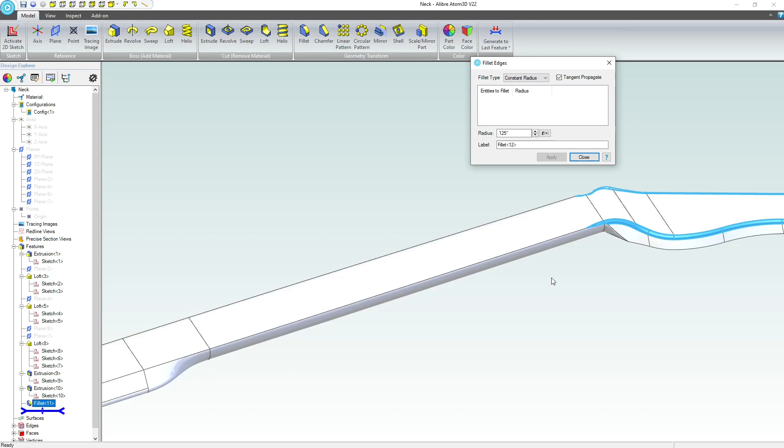Let's start by going to the fillet feature. If I fillet this top edge with an 1/8 inch radius, that seems to go in no problem. But if I try to add a fillet here, we get 'too complex for capping.' So we're going to get rid of that fillet and try to add one in a different way.

It appears the capping issue happens because we have some convergent edges in here, and we can easily clear that out. Maybe I'll select this whole edge so there's no question as to how I want this fillet to go through. Similarly, I can highlight some of the edges up here and do the same thing. We'll send this fillet down this edge and apply, and that fixes the 'too complex for capping' issue.

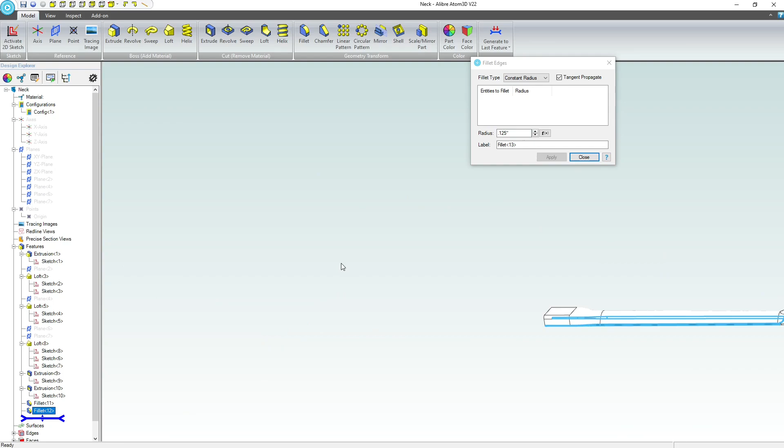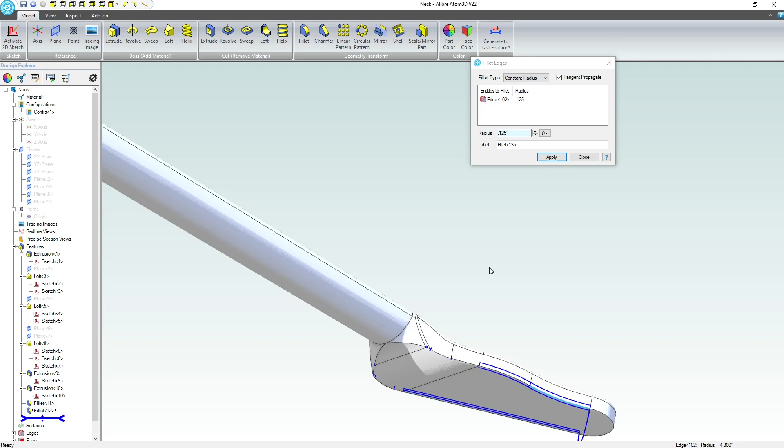If I look a little closer, our edges are indeed smooth, which is quite bolstering. So we've at least smoothed out the top. Let's also smooth out this bottom here. You can see that goes around pretty nicely, so we're able to smooth out the bottom there. Everything else, apart from maybe right here, should be smooth.

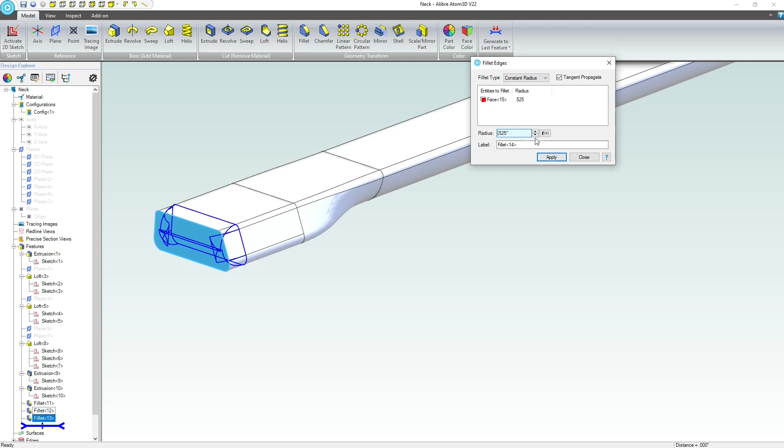We did have an interference issue on this edge right here with the mating component, so I might want to move that up. Maybe not that far, of course, but 0.525 ought to be fine. So we'll close that, and I think this could be a neck without sharp edges.

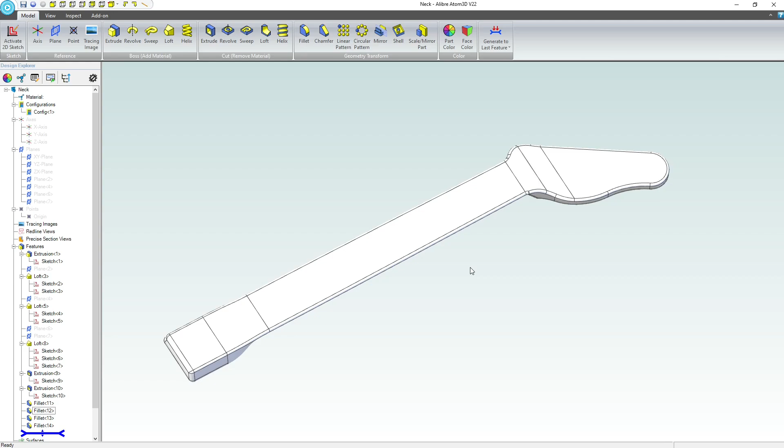That's pretty cool. Next, we'll want to add in frets. Frets can be tricky, but there's a good source, right? StewMac.com has a fret position calculator.

Let's say I enter in 24 frets and an unusually long scale length of 27, where the scale length is from the nut to the bridge, the total length of the string. This would be the dimensions for that specific configuration. So depending on where you place your bridge dimensionally, you can actually scale each fret to be whatever you want. It works in millimeters or inches. I work in both units on this channel, so I'm doing inches on this one.

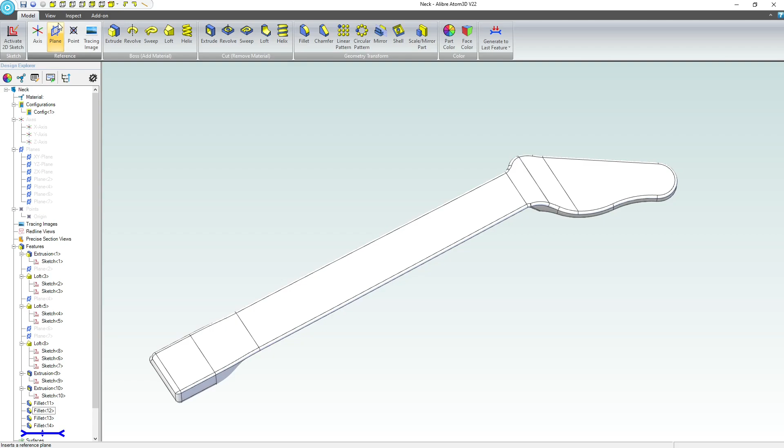Let's actually add some frets, and to start we need to add a nut. I'm going to go to my view and toggle my planes here. I may need to toggle my sketches at some point as well. I'll highlight this nice center plane and activate a 2D sketch on it.

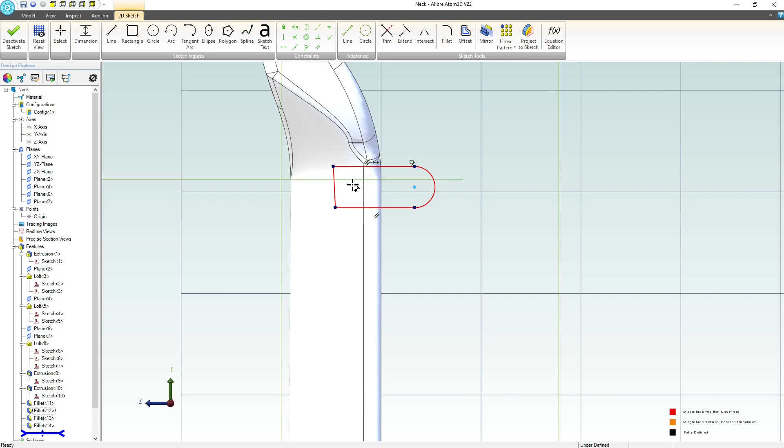Let's make a line, then an arc, and then another line. I have to dimension the nut in a way that the bottom of the string on the nut clears the top of all the frets. I don't know the ideal dimension for that, but I'm sure we can take an estimate here.

Let's go with 0.7 perhaps, and then I'll add a vertical relation there. While I have my vertical up, I can add that there, which looks like it's already fine. There we go. Now I want to make a dimension relative to this edge, maybe 0.25. So that's still a bit high—0.15 maybe. And let's go here with 0.15 as well.

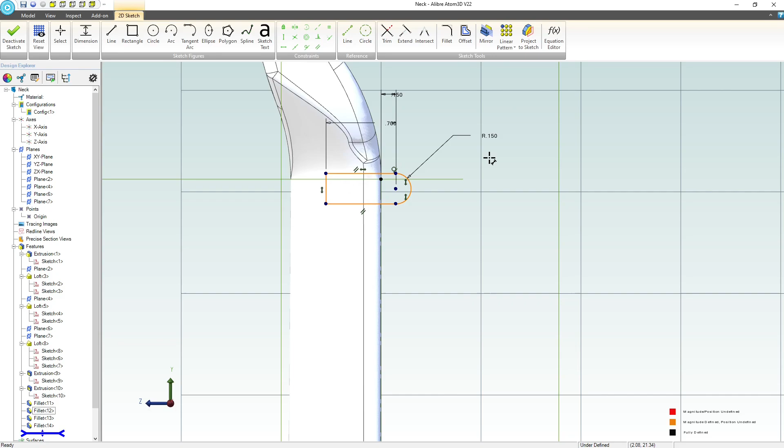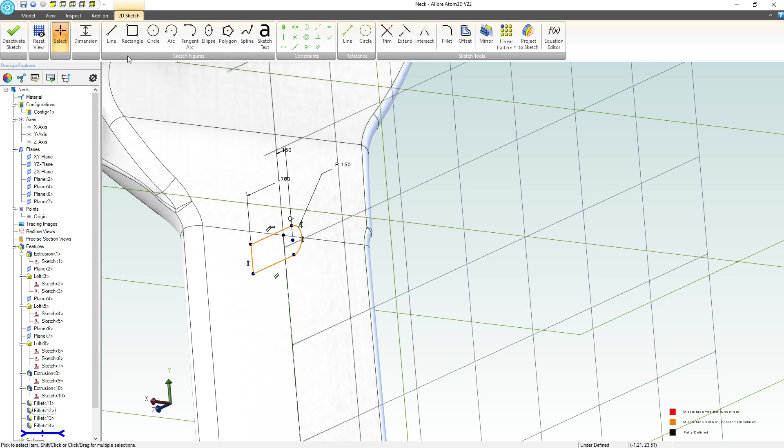And then of course you can see that this line here marks where the very top of my neck is. So this is the point where I'd want the string to be, the first free part of the string. Technically I ought to have this line lined up with this line here, so I'll be able to properly dimension my neck. We'll reset my view.

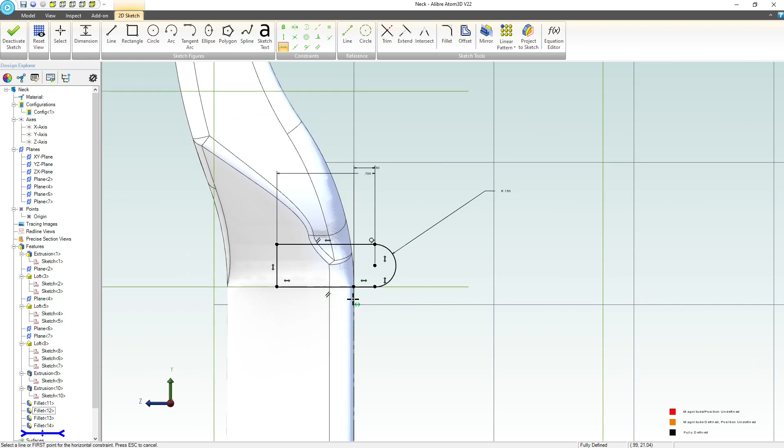So we're going to go from here, and I'll hold shift and highlight here and add in a horizontal. That means the string is free to vibrate at this line and down, and that's where I want to start my dimensions and offset all my frets from. This seems like it's still a little bit of a large nut, so I'm going to say 0.075.

Right, let's reduce that a little bit. Then it's a question of how far do we want to move out. Now that I'm looking at this 0.7 dimension, it's a little bit large, so let's reduce that so we don't have an extrusion hanging out the bottom.

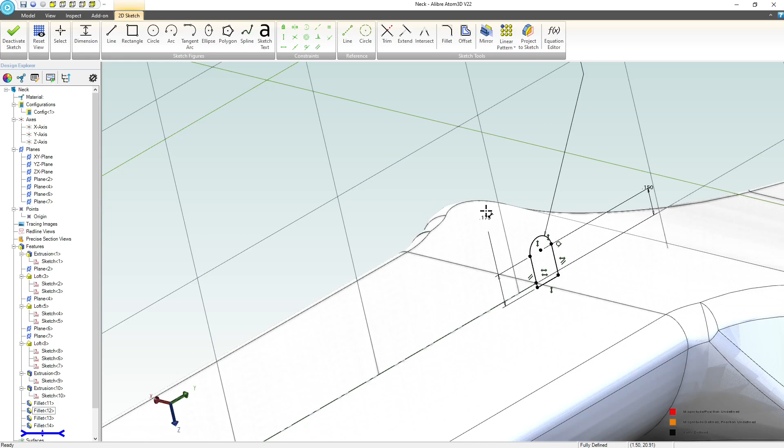0.02 is clearly not a good dimension. 0.1 is not good. 0.15 lines up perfectly. 0.175 goes down a little bit, so I'll try that. Now we're going to go to an extrude.

We'll say mid-plane. And if I visually drag this... that moved on me. That seems like a pretty good dimension. Right, so there's our nut. That's probably a bit tall to be realistic.

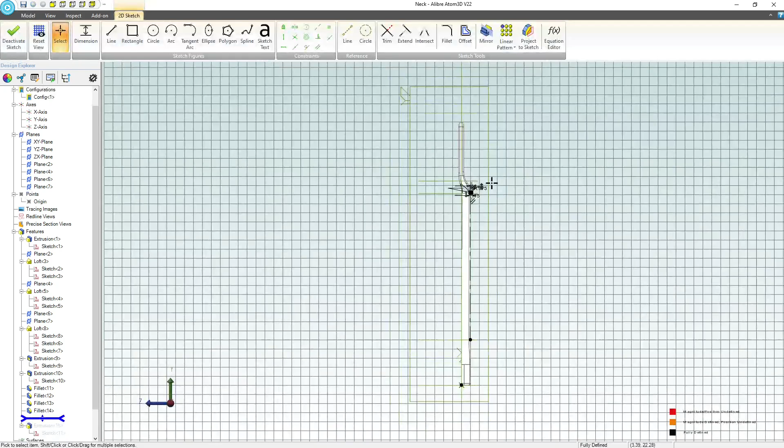But depending on how you cut the grooves for the strings or other things, maybe you can make it work. Let's edit the sketch though, and I'm going to lower that a little bit further still. I think this also depends on what kind of strings you use too. So if I lower that down, let's try 85 thou there.

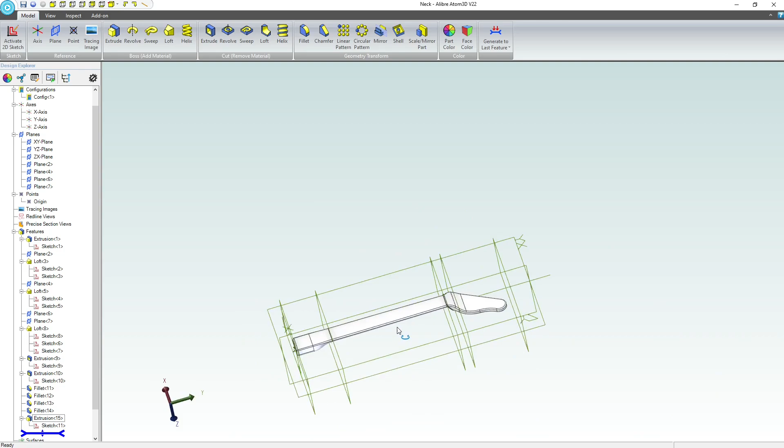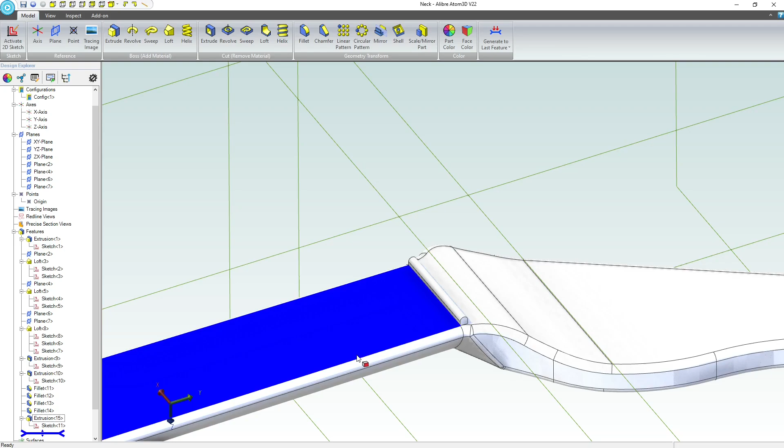Okay, so how do we make our frets? There's a number of ways to do this. One, I can draw a little circle. Frets are probably a little bit more elliptical, but you could model them as perfect circles. I could make a sketch with a perfect circle every so often, dimension them all in one sketch, and do an extrude or sweep across. Or I can model one fret at a time using a pattern. I'm going to go with a pattern, but anyone is welcome to do whatever feels best for their design intent.

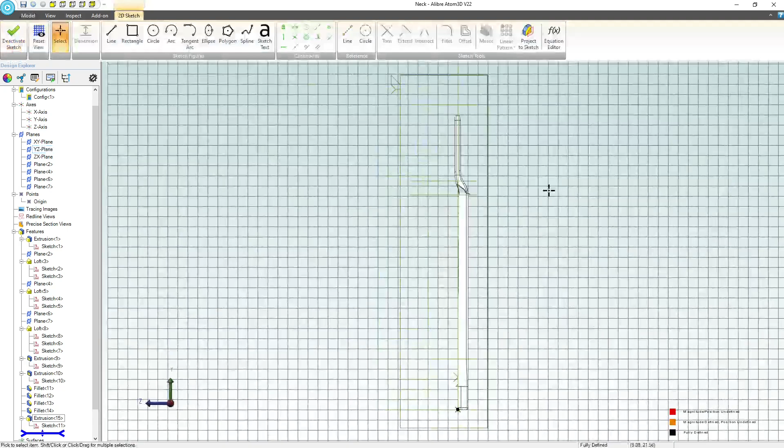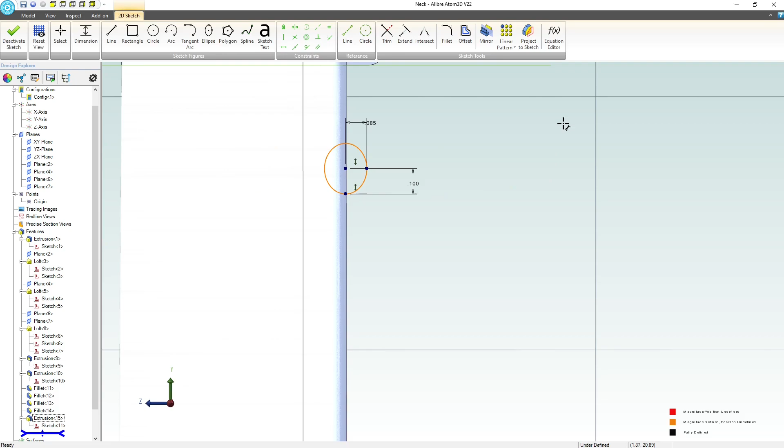So on the YZ plane, let's activate a sketch, and we can do an ellipse if we want. I think that's pretty cool, a little bit more advanced modeling. If we go to dimension, we don't want it quite as elliptical, maybe 0.1 by 0.085, just a mild ellipse like that.

And I think that fret is actually a bit large. Let's scale everything down by half, divided by 2 and divided by 2.

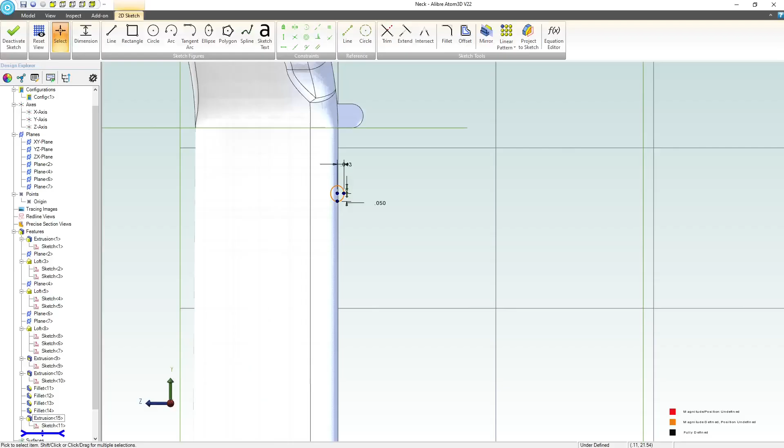Now this point, this edge right here is what we want to dimension off of. And I can go to my calculator and say 1.515. Then I have the distance from fret to fret and also the distance from the nut, depending on how I want to constrain my sketches. So let's take care of this. 1.515, right? And then I can start to repeat, and I'll add a coincident just to make sure we're fully constrained here.

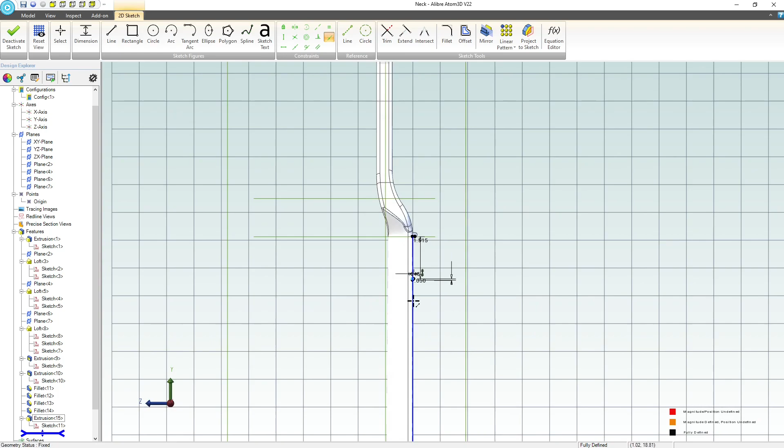I could just sketch another ellipse or circle, and another and another, and do this all in one. That's a perfectly fine method.

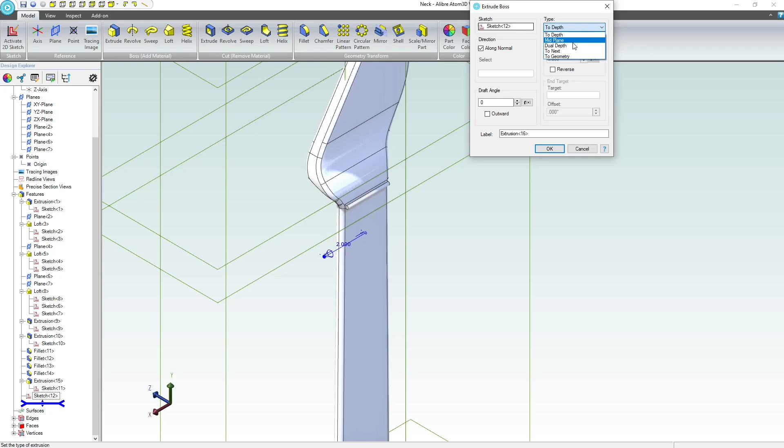For me, I'm going to try something a little bit different. So I have my sketch 12 right here. We're going to go to extrude. It should extrude to the same length, and we're going to say mid-plane, done.

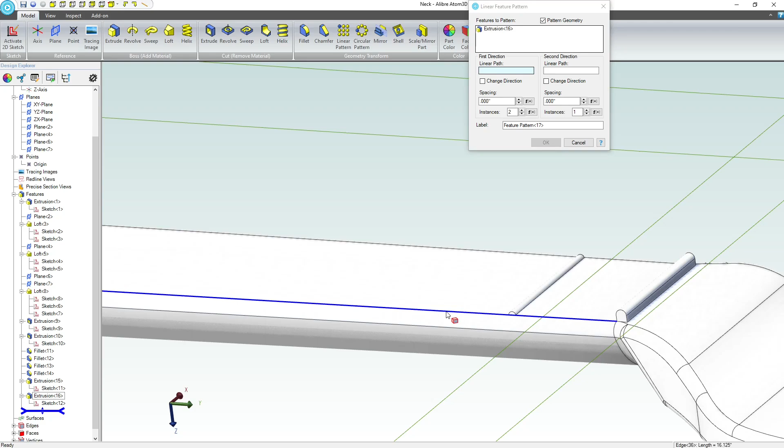So the other method I'm going to do is choose a linear pattern. We're going to choose this feature here, and we're going to choose our path right here. Or I should say our path would probably be better as an axis right there. So we're patterning down the y-axis. We want spacing to be 1.430.

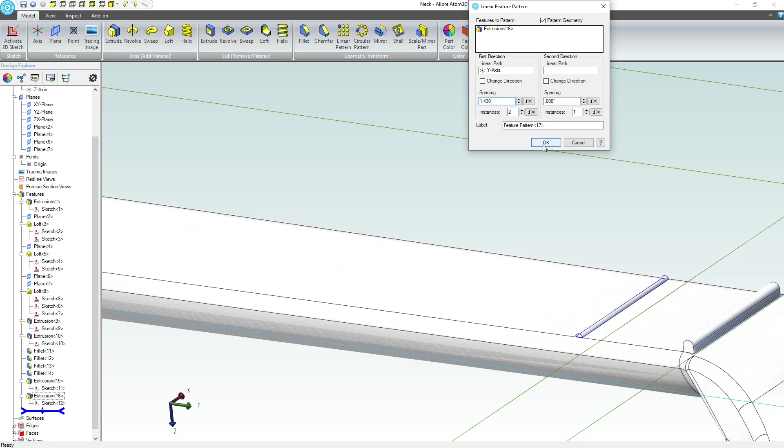And of course we'll edit that and change direction. I simply create a pattern for every fret. It's a little bit time consuming, but so is sketching everything out and adding dimensions for it. I don't think there's a shortcut for frets like this. I'm going to keep patterning one fret after the other to the dimensions I wish. I will not make you sit through this, so I'll fast forward and see you on the other end.

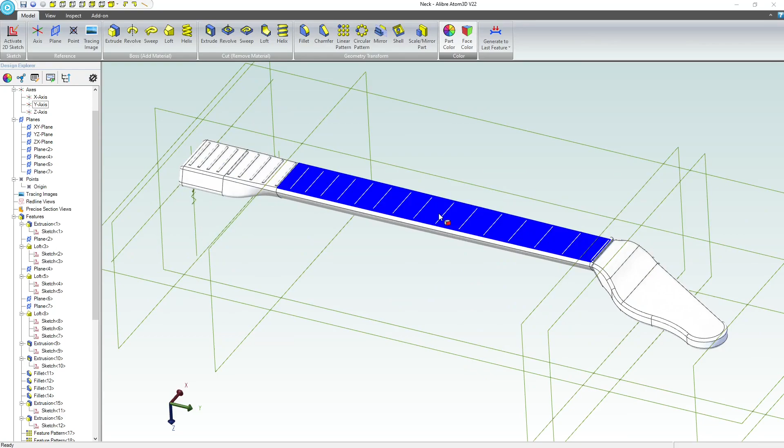And it looks like I actually mistakenly made this an inch short compared to the number of frets I'd like to have on this. So let's deal with that. It should be pretty easy to go back into history and make this a bit longer.

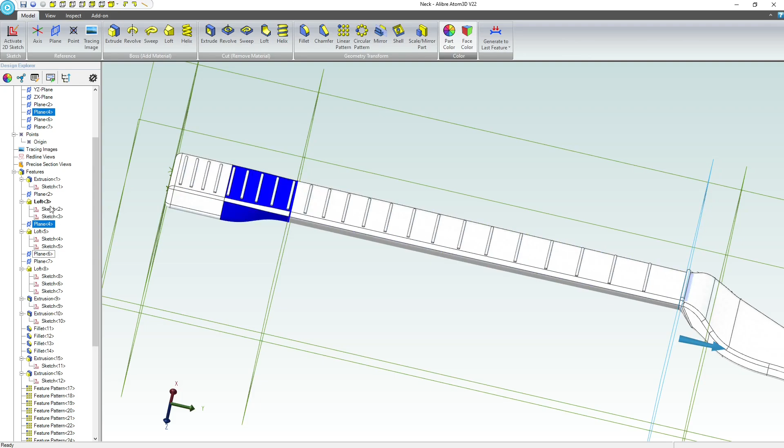So it looks like this plane is the plane that defines the length of my neck as far as the string is allowed to vibrate. So we're going to edit the position of this plane by adding an inch. And because all of my frets are dimensioned relative to the nut, we should not have any dimensional issues with regard to the frets. It does look like we've got a fillet problem here.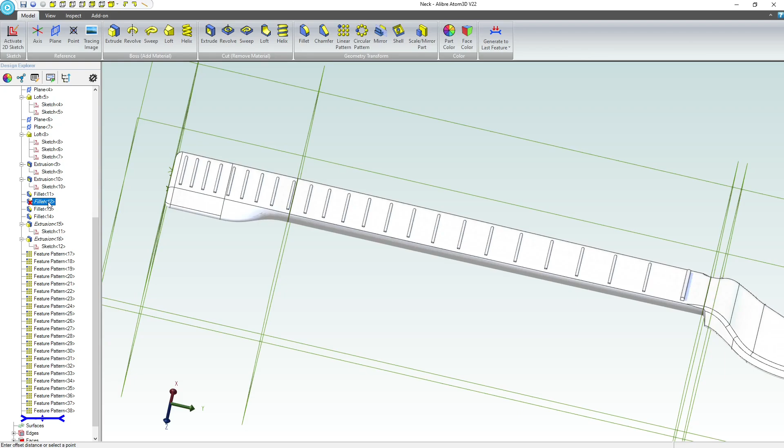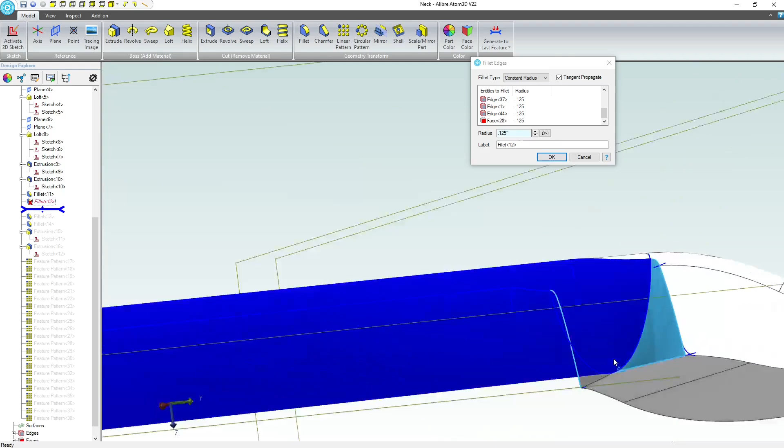How about I roll this back to where my fillet problem has occurred? Yeah, let's edit that. Right, so this is the problem we're having with the fillet, and of course this goes back to how we've dimensioned our loft.

So let's go back to this loft here. We have this sketch, and this sketch, and it looks like our other planes also need to be defined to be an inch longer, and that is where the problem has occurred.

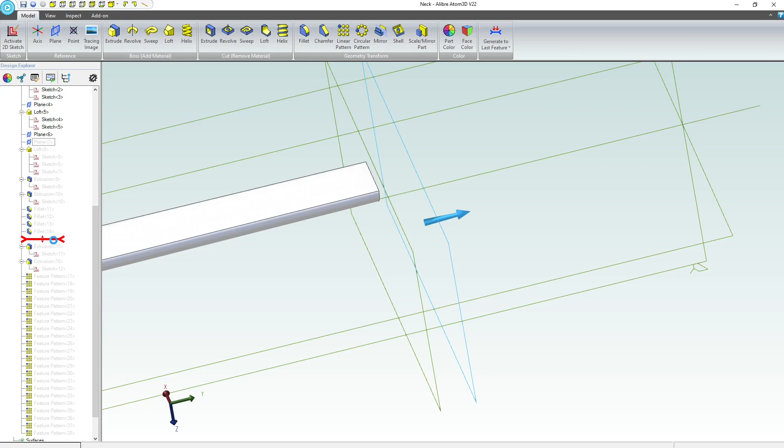So I'm going to edit my plane, and we're going to say 23. And roll that forward. And it looks like that actually worked everything out.

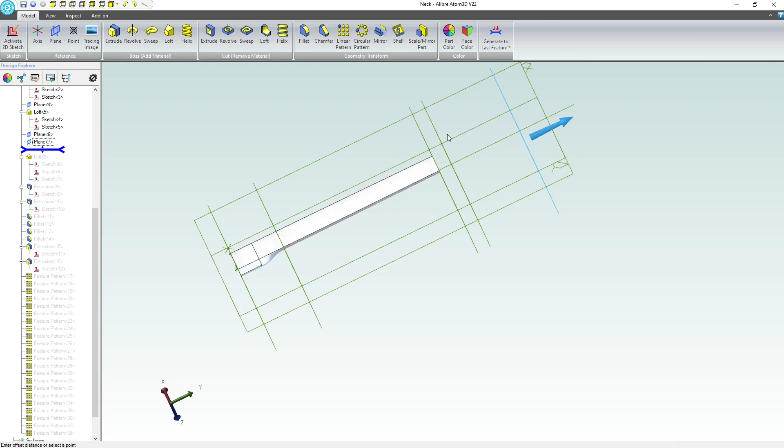But this plane is a bit too close for comfort, so let's go ahead and edit this and add an inch on it. 31. Again, this goes back to design intent. At the time I thought it was a good idea to make sure all my planes were relative to this one, but maybe the head planes had a better intent to be relative to one another. That's a pretty fine point and a rather unforeseen issue.

But now you can see we've updated. Our fillets are fixed, so we didn't even have to redo a fillet. We just had to change a few dimensions. And it looks like we're back in business now. I can finish up my other two frets. I might want to make these wider.

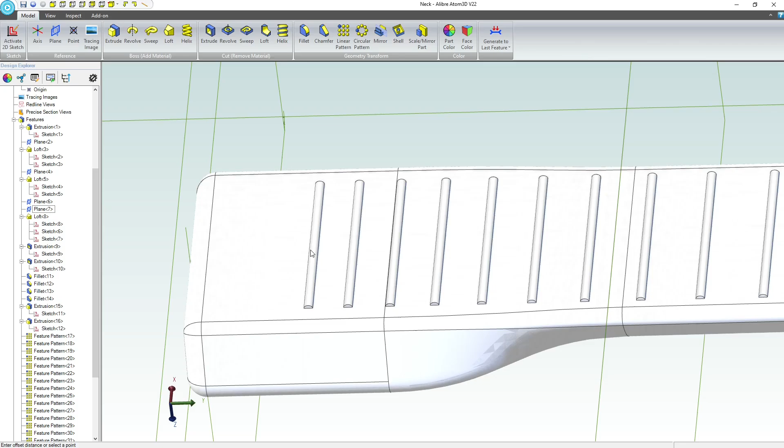So there we have a fretboard, and this is one way of doing it with all the patterns. Now the advantage is, instead of a big messy sketch, I have just some feature patterns that fill up my tree, and I can edit them one at a time, and it's really simple compared to a sketch with a bunch of dimensions on it.

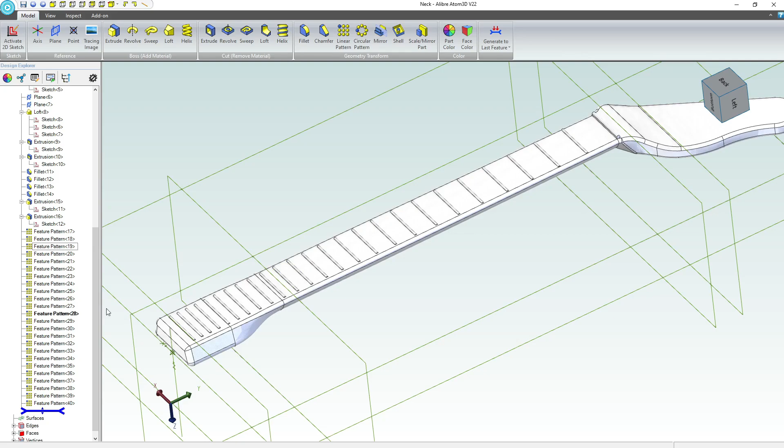The disadvantage is I have a little bit less control. You can see that my neck was made to taper down, and I have a gap here that's kind of large. But up here my gap is very small, and that's because the frets remain the same size as I progress down the neck, which gets wider.

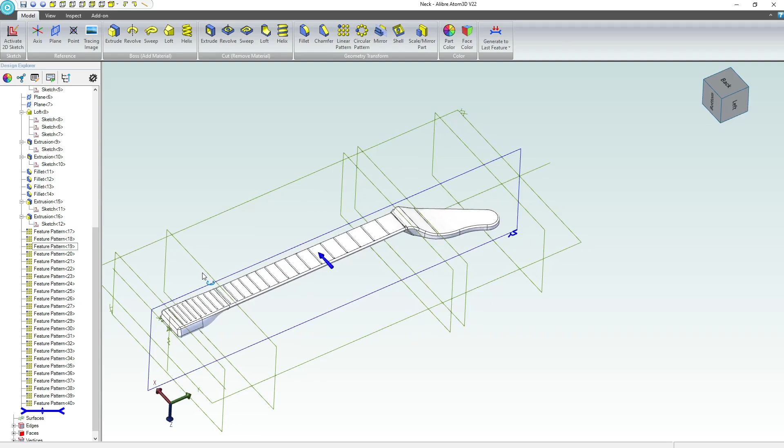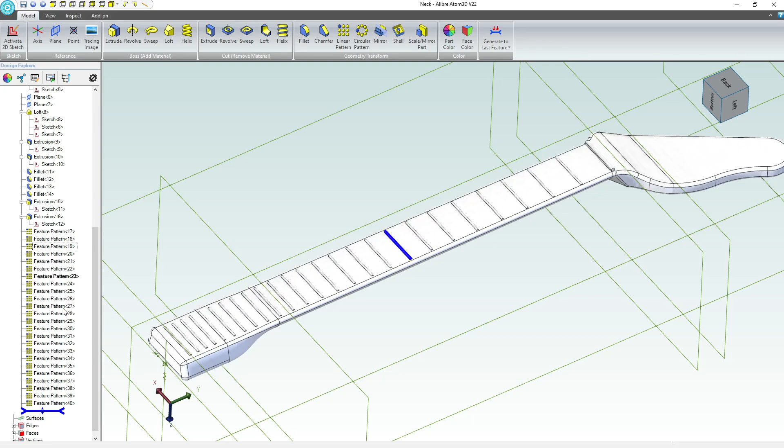So I'm going to demonstrate a different way of doing it. We're going to do this in one big sketch. I'll fast forward because you're just going to be watching me get dimensions from the calculator I've shown you how to do, so it's not really beneficial to learn. I'm going to make this one big sketch, and let's do this all over again, but this time with a sketch instead, and I can show you a little bit about how I can alter where the frets end.

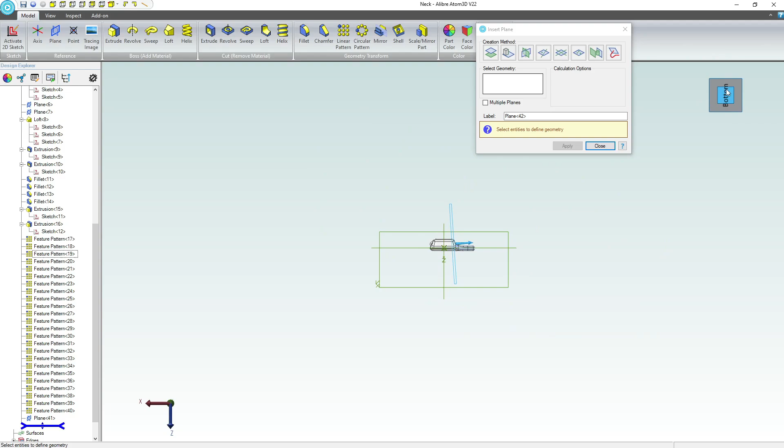I'll make a plane, a 3-point plane, and select vertexes for my model. I'll select a vertex here, and one here, so we get a nice edge where the frets will be leaning in, kind of like on a real guitar. Then a vertex here, and I'll apply that. Now you can see I have a plane that moves angularly up and tapers with the neck, because I chose the wider part here and the narrower part up here. So we'll close that.

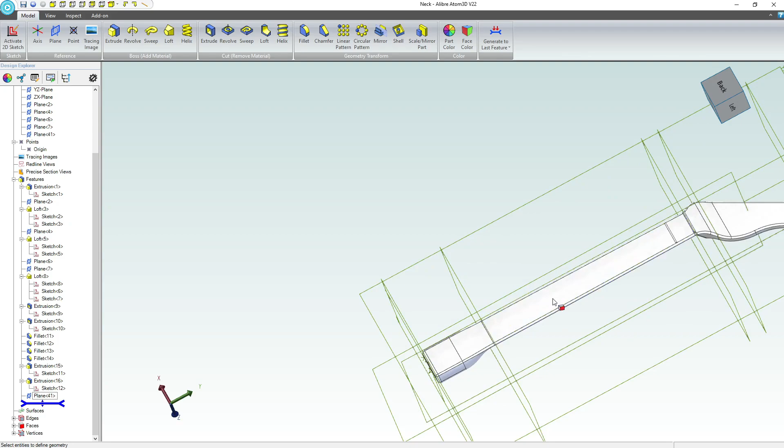I'm actually going to delete all of my feature patterns. Now I'll go to my original extrude for the first fret here. We're going to edit that, and instead of mid-plane, let's go to geometry. Well, planes count as geometry. And of course, I have to cancel this, right? What I have to do is take this plane and move it before my extrusion so that I'll be able to see the plane when I edit my extrusion.

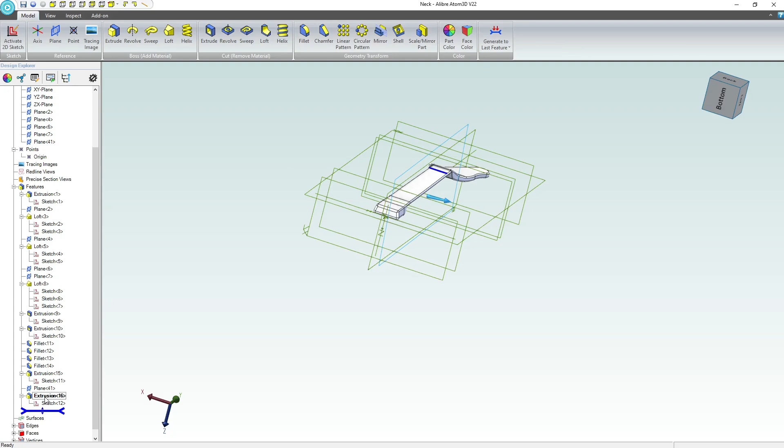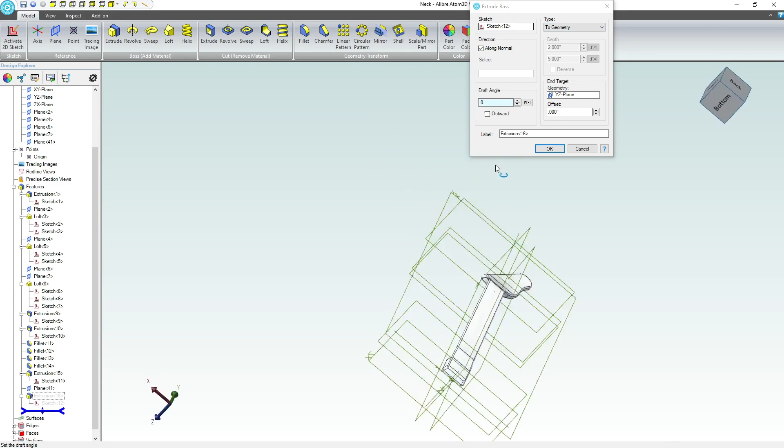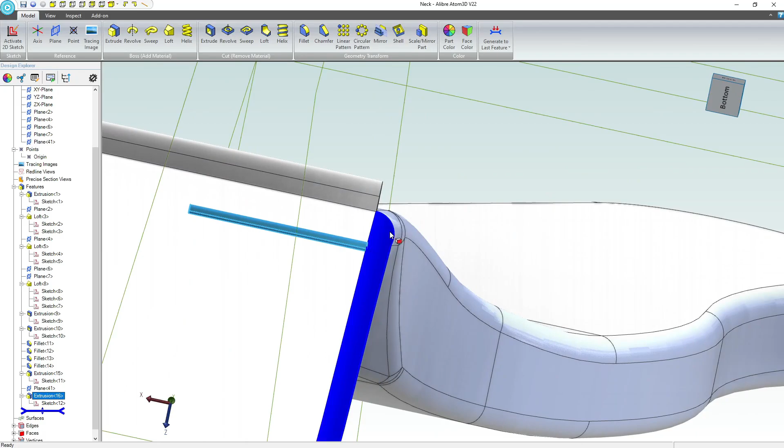And we're going to say to geometry, this plane. That failed, of course, because let's select the right plane there. There we go. So my fret is going right up to the edge. It has the angle like we talked about with the angle on the plane, and that angle is adjustable, by the way. And let's now modify our sketch.

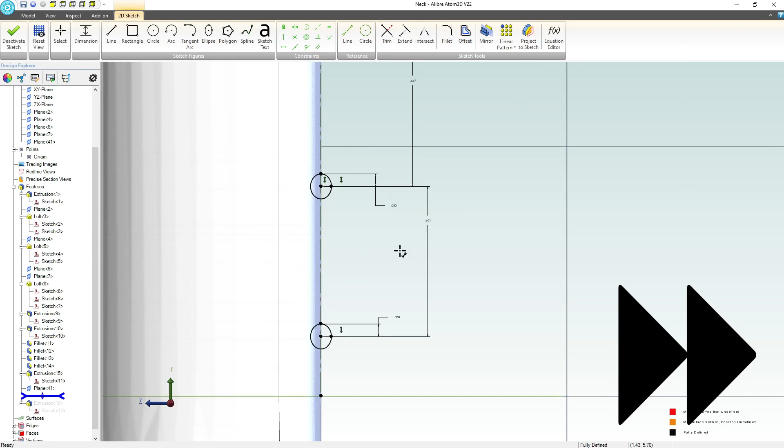Well, now it looks like I was right in the first place because it looks like we're about 1 inch too long. So that was a good exercise in being able to correct some things, but it also appeared to not be necessary. So I probably added an extra fret by mistake or something last time.

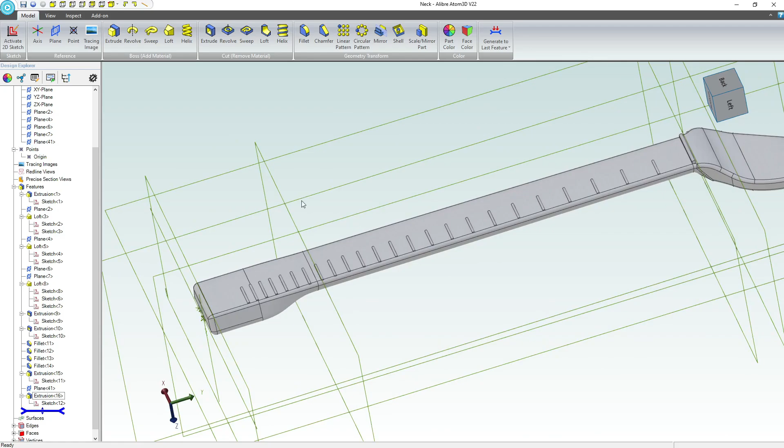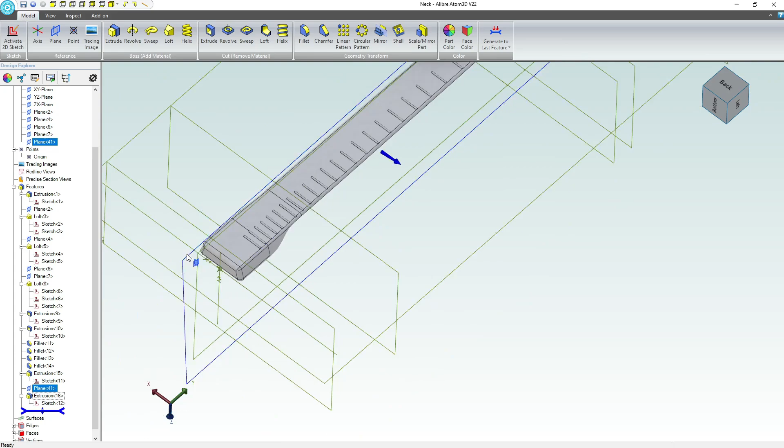That can happen. When we look at our frets, we can see we're spilling over the edge just a little bit in some places. So we could make some further adjustments if we wanted to. I would probably just make another plane, offset it a slight amount, and extrude to the new plane a slightly less distance. For what I'm doing, I think I'm all right.

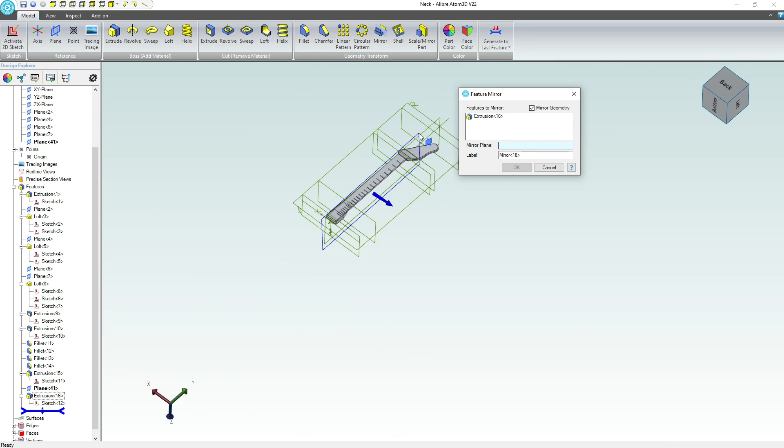Now, I'll grab my frets, and I really care about my extrusion here because we are extruding down the center plane. So it's pretty easy to do a mirror, and we'll mirror about our plane that runs through the middle. And there we have it.

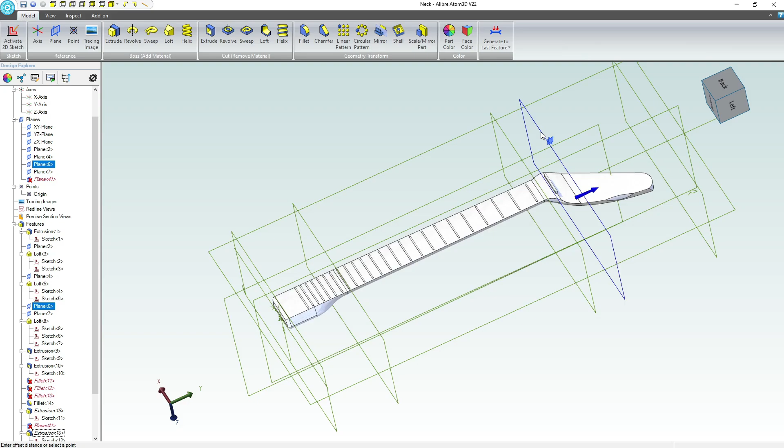I can probably reduce my planes once more. So we'll edit the position of this, going back down to 21, which I really thought was correct. We'll generate to our last feature. And then we'll take this plane, and you can see how it's affected our neck.

So we definitely, or our head rather, we'll definitely want to take that back down to 22. Generate to last feature. And the last plane is fine, really, truly, it is.

I'll keep up with this method, right? So we've got a big long sketch. If I regenerate all, you can see it really doesn't take a long time to regenerate everything, so our sketch hasn't hurt us performance-wise too much.

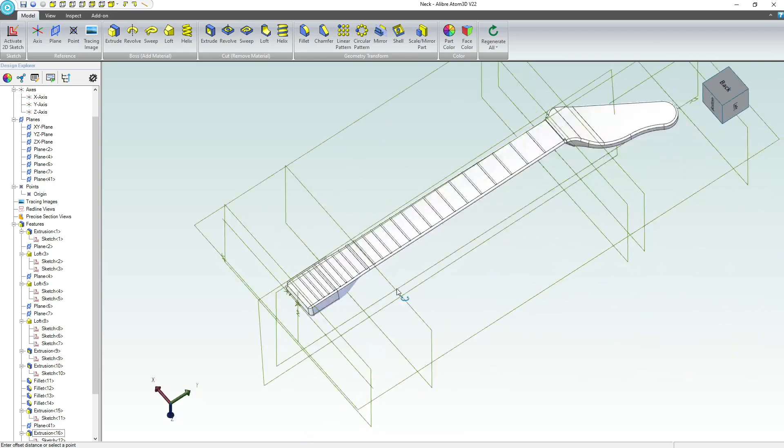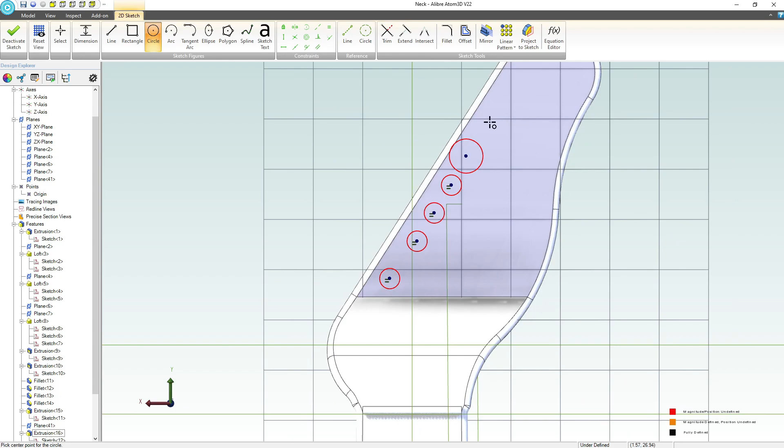All right, next, let's make some holes for our tuners to go into. I want to sketch on this face, and this should be a lot easier than adding frets, actually. I want to do a series of circles. It'll be a six string guitar, of course. So there's our 6 holes.

Hopefully I can box select all of these and choose equal. Of course, I think since I have multiple equal relations in there, it doesn't quite let me, but there we go.

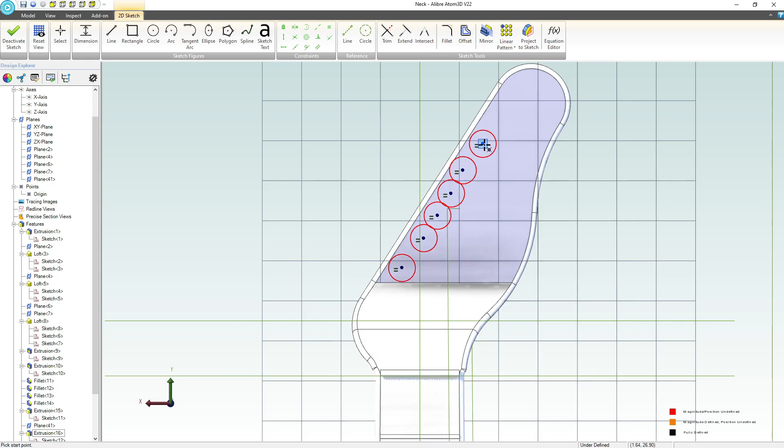Well, I want to draw lines between all of these, and I also can set these lines to be equal. And I can also set these to be parallel.

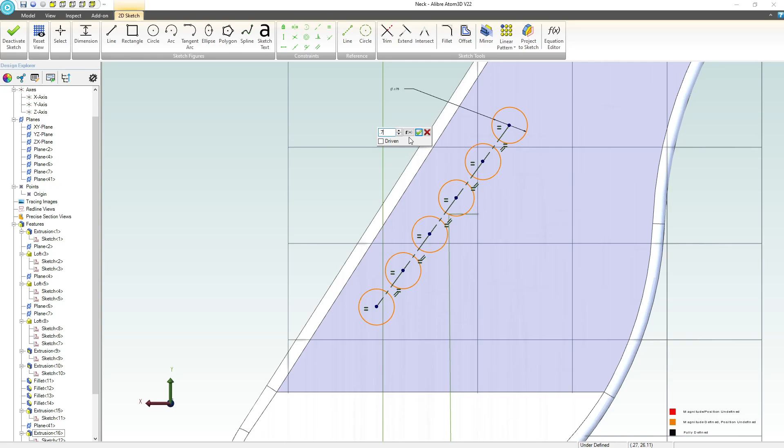I can establish a dimension. Perhaps I want these holes to be something like 0.375, and the standard distance between them to be something like 0.75, maybe a bit more. 1.25, okay that's a bit much. 1 maybe, that looks about right.

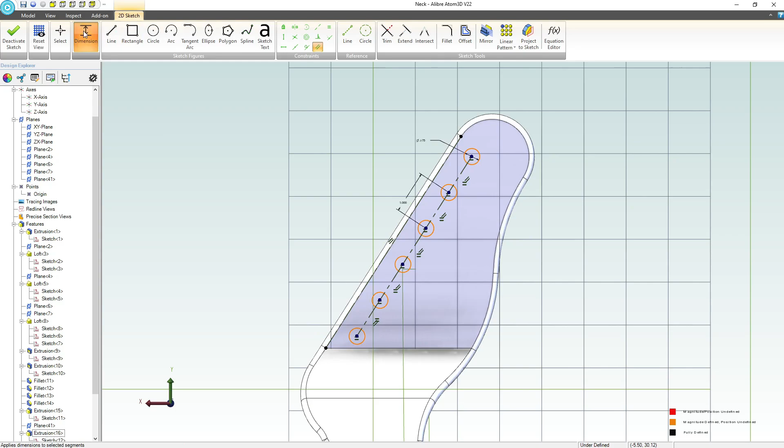Now if I try to drag this around, it should move as a uniform set of holes. So I'm going to add one more parallel, this edge with this line, and then I have 2 degrees of freedom here, and so I can establish a nice X and Y. Perhaps my X is 0.7, and my Y would be my height here, of course, 0.25 is fine.

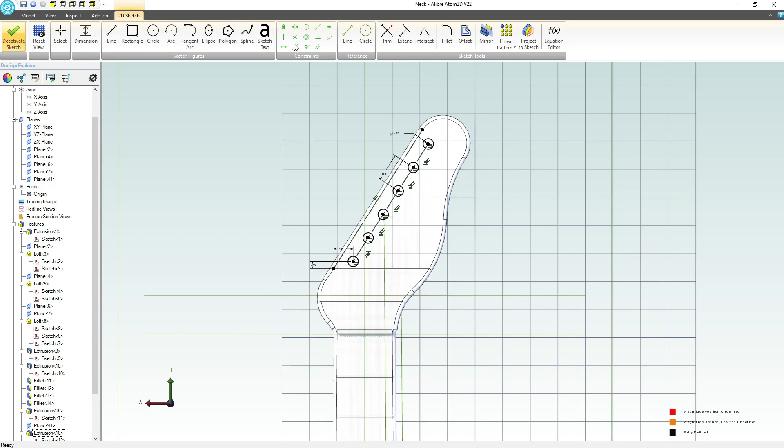Yeah, that looks like a guitar. So we'll deactivate, we'll go with extrude cut, and we can have it go through all. So we've got that worked out.

Now I'll save my neck. Now with that saved, I can open up my assembly, and look how my assembly has updated.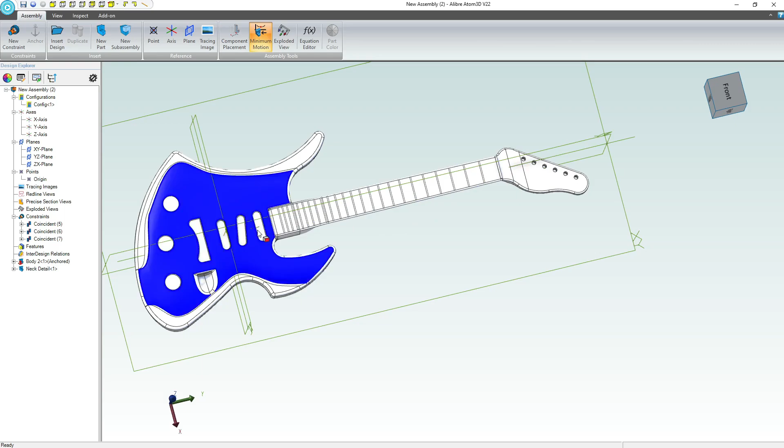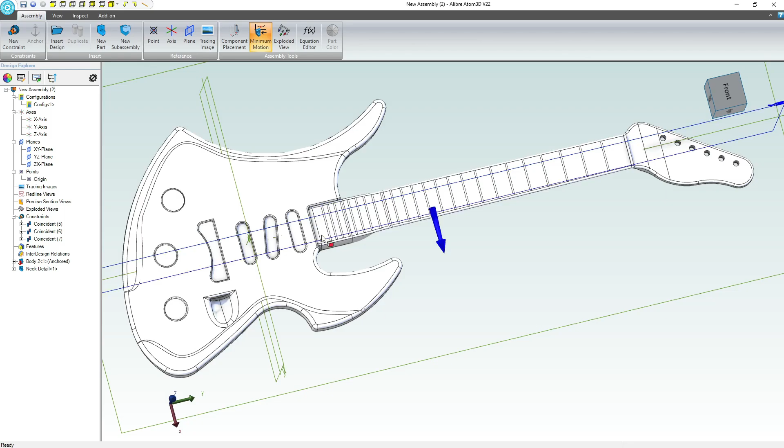So that's really cool. We can even take more length off that neck or add another fret if we wanted to. I think that would be quite redundant, we'd have to redimension all of our frets, but we could do one of the two. I would be in for lowering the length of the neck again, because it looks like I need to forever change my neck length. But this is starting to come together as a good looking electric guitar.

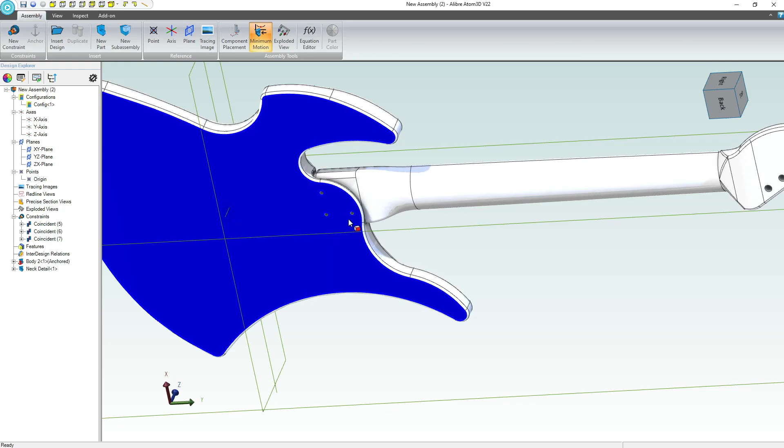I think the last thing we want to do is make some holes in the neck for these bolts to fasten into. And you can, if you'd like, make some dimensions and measurements and just add 3 holes into this neck, or you can do an in-context edit.

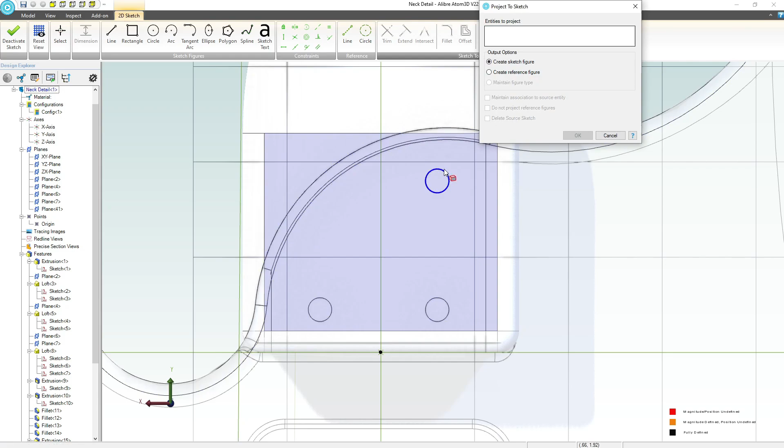I think I've shown this before, but if I right click on my neck and choose edit here, now I can edit my neck as a part of the assembly, and this gives me a few advantages. I can create a sketch on my face, and now look at these holes from the body are selectable, and so I can choose project, I can choose my hole, and we'll maintain association. And if I were to change the holes on my body, the next time I open my assembly, the holes on the neck will automatically update, which I think is a super nice thing to do.

Now I don't want to use this exact size of hole, because the body would be a clearance size hole, and we want to have a hole the size that a fastener can fit into. So I can highlight all these holes and convert to reference figures, and now I have a center point on a reference figure that I can use to create a placement for the hole, right? This, if I wanted to, and you can use the hole wizard for this, which is a very effective way to do things.

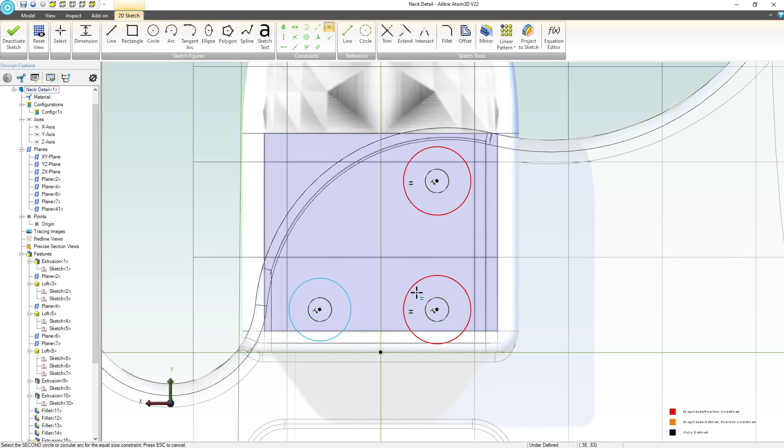But I know I'd want my holes to be slightly smaller so that they can be tapped. So if I make all of these equal, and I give this a dimension, I can't remember what my holes were originally, looks like they were 1/4 inch. So I can go down to 0.2, and then there's some meat to add threads in. So that's really cool, we'll just make this a tap hole.

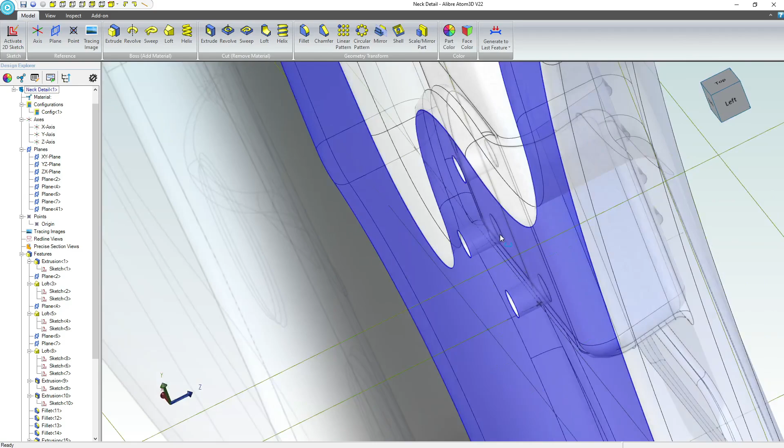We'll deactivate, and then if I go to my left view, I'll choose extruded cut, and I'll choose my sketch, which is sketch 14. Back to the right view now, and I can choose a position that doesn't go all the way through the neck. Maybe right there.

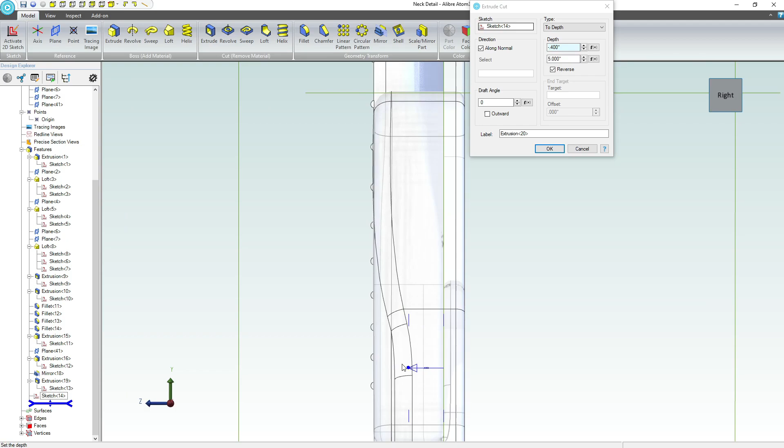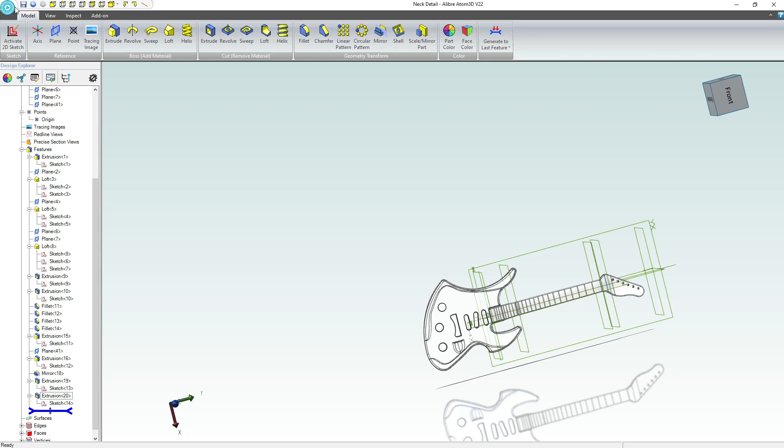So I think we've added all the detail that we need to in our neck. Maybe one last, okay, as one last treat, because I'm really getting into this video today, let's do one more. So I'll head on back to my neck. If I close and open my neck, I now have the holes.

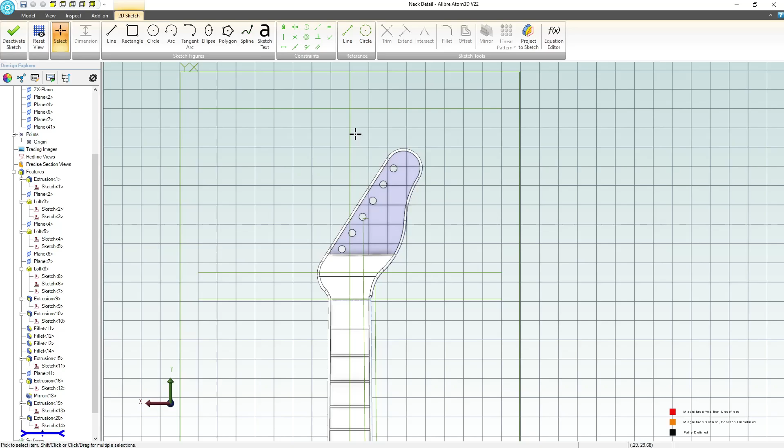And okay, one last thing, this should be a lot of fun. I'll choose this face right here, activate a sketch. And how about I choose sketch text? We'll go with sans serif. I'll add in the channel name.

Maybe a Segoe script. Yeah, let's make this. How does 45 degrees look? We're getting there.

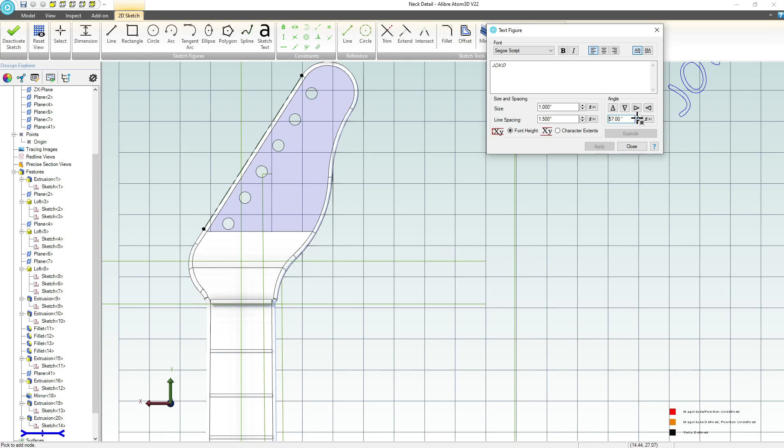That's cool, so we'll apply and close, right? And that seemed to work out pretty well.

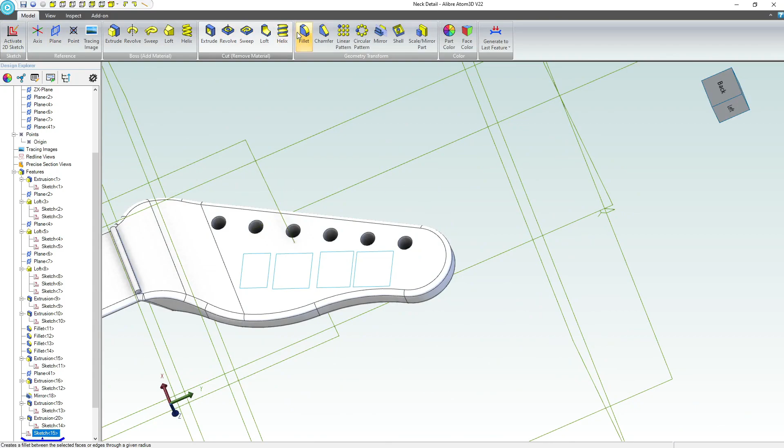So from here, let's deactivate, extrude something small, 1 thou. I'll edit that and reverse. And we've got a nice little logo up there.

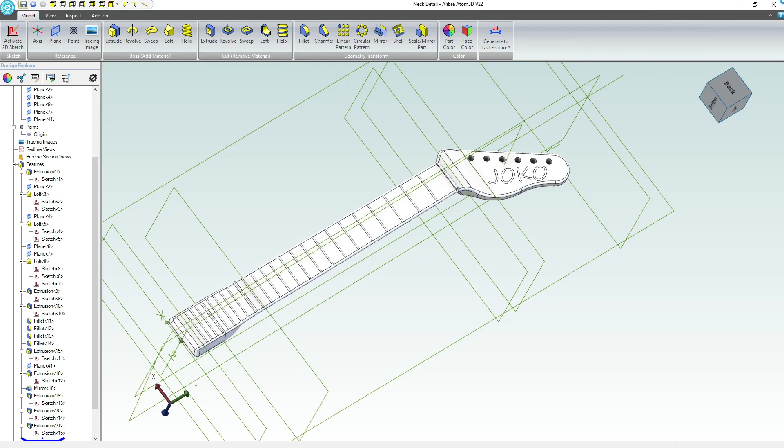So I think we have more or less a complete neck. Let's save and close, and there it is, updated in the assembly.